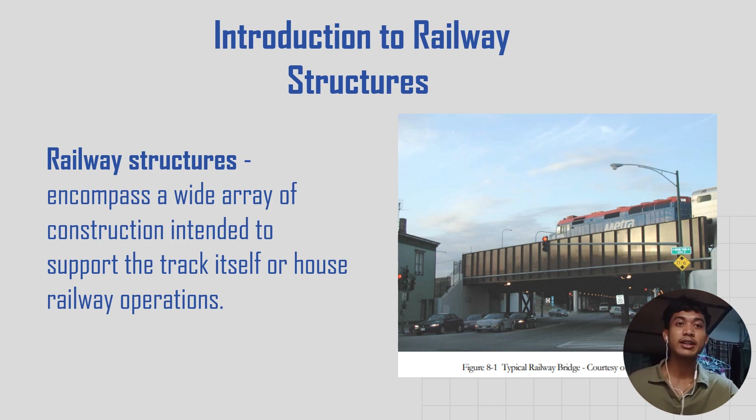So, what is a bridge deck? A bridge deck is a portion of a railway bridge that supplies a means of carrying the track rails. So when we say a bridge deck in a railway track, it is like the train's pathway when it goes over a bridge. It's like the surface that supports the train tracks, allowing trains to safely cross things like rivers or gaps in the land.

Imagine a train traveling on a strong structure over a river. The part where the tracks sit is the bridge deck. The deck needs to be really sturdy to handle the weight of the train and the forces it creates. Depending on the bridge, the deck can be made of materials like concrete or steel. So, when a train is going over a bridge, it's moving on a bridge deck.

As you can see here in this visual representation, we have an example of a ballast track. A ballast track contains a ballast section on the railway. So this is the rail. This is the sleeper. This is the ballast section, where rocks are located. We'll be talking about this later, but first let's focus on what is a bridge deck. So this is a bridge deck, the one that carries the weight of this railway.

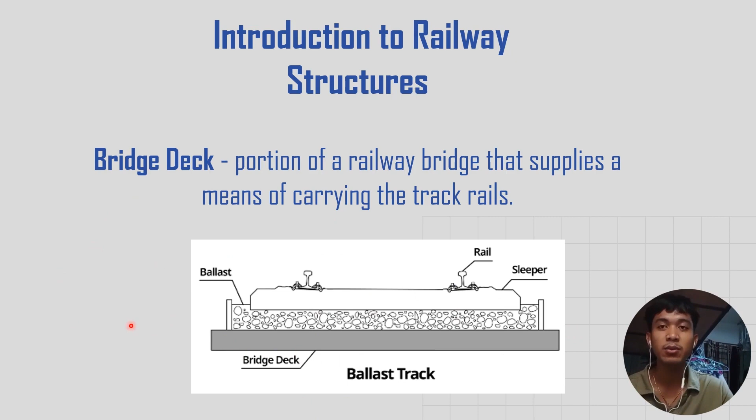So basically, there are two general types of bridge deck. The first one is the open bridge deck. The rails are anchored directly to timber bridge ties supported directly on the floor system of the superstructure. The second one is the ballasted bridge. The rails are anchored directly to timber track ties supported on the ballast section. So let's explain them one by one.

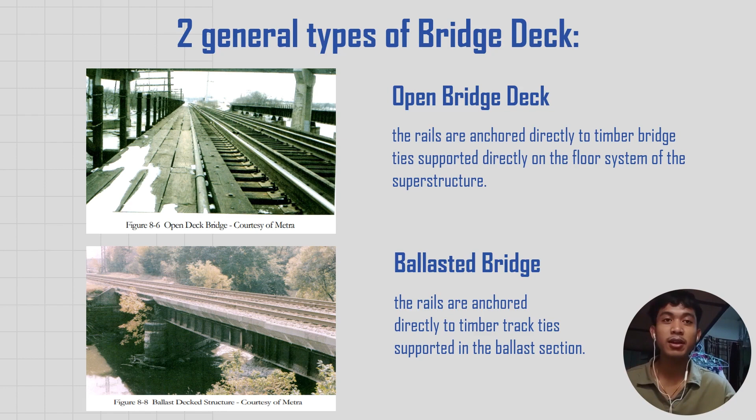So let's first talk about open bridge deck. An open bridge deck is like a big, strong platform held by supports, and it's used to help things like roads or trains cross over something like a river, valley, or other road. The word open means that it doesn't have a roof or walls. It's more like a wide and sturdy floor that lets you see through.

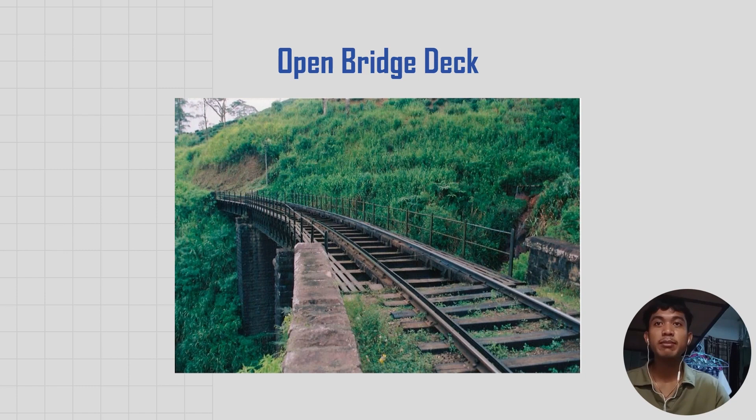So the openness of the bridge means it doesn't have roof or walls, as you can see in this illustration, making it lighter and allowing wind to pass through. This design helps keep the bridge steady and safe. In simple terms, an open bridge is like a strong and elevated road or track that helps people and vehicles go from one side to the other without any trouble. The openings in the deck also allow for better ventilation, which can be important for certain types of bridges or for managing heat generated by trains.

The second type of bridge deck is the ballasted deck. The timber track ties, also known as sleepers or cross ties, are horizontal supports that hold the rails in place. These ties are placed on a layer of ballast, which is a material like crushed stone or gravel. A ballasted bridge is like a strong and stable pathway that goes over something like a river or a road. It's made with a special kind of rocks or stones called ballast, placed on a bridge to provide support and stability.

So unlike the open bridge deck, the ballasted deck is supported by ballast. With the help of these rocks, the bridge is stable and sturdy.

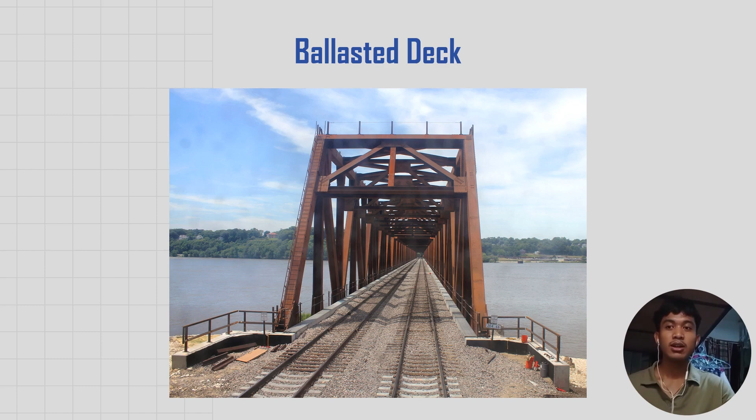So, the purpose of ballast in a railway track is to provide stability, as what I've said earlier. Also, it helps to drain water and support for the tracks. Ballast is a layer of coarse, angular stones or gravel that is placed on the roadbed. So, what's the purpose of ballast?

So, natay four diri akong gibutang, four. So, first is stability. Why? Ballast helps distribute the load of the train and its cargo evenly across the underlying soil. This distribution of weight prevents the tracks from sinking into the ground and provides stability to the railway track. So, it helps distribute the load of the train evenly sa katong railway across the underlying soil. The second one is drainage.

So ballast allows for proper drainage of water away from the tracks. The open spaces between the stones permit water to flow through, preventing the accumulation of water that could otherwise weaken the track structure and cause erosion.

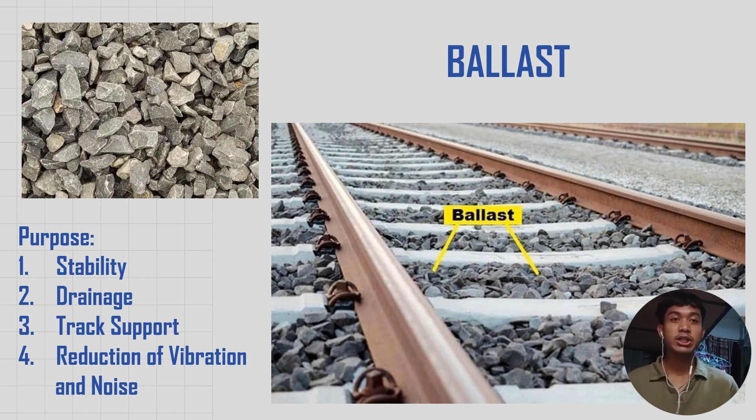So after the four purposes of ballast, napod ay four ka reasons. The first one is angular shape. Ballast stones are typically angular rather than rounded. As you can see here, wala kayo makita nga rounded ballast, puro angular shape. This angular shape helps the stones interlock with each other, creating a stable and compact layer that resists movement. This is crucial for maintaining the alignment and stability of the tracks.

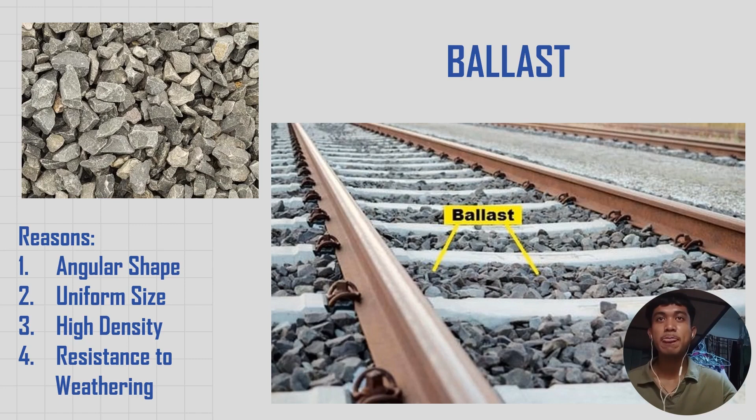Now let's proceed to structural design. So what is structural design? It is the methodical investigation of the stability, strength, and rigidity of structures. The basic objective in structural analysis and design is to produce a structure capable of resisting all applied loads without failure during its intended life.

So structural design is the thoughtful and meticulous process of developing plans for buildings and other constructions, ensuring they are not just aesthetically pleasing, but more importantly, stable siya and secure siya. It begins with a thorough understanding of unsay purpose aning na structure. Pang residential ba ni siya, pang bridge ba ni siya, or skyscraper.

So engineers carefully select materials like concrete, steel, or wood based on their properties and suitability for the project. The design process involves calculating and distributing loads, considering factors such as the weight of the structure, environmental conditions, and potential stresses. Safety factors are incorporated to provide a margin of safety, guarding against unforeseen circumstances.

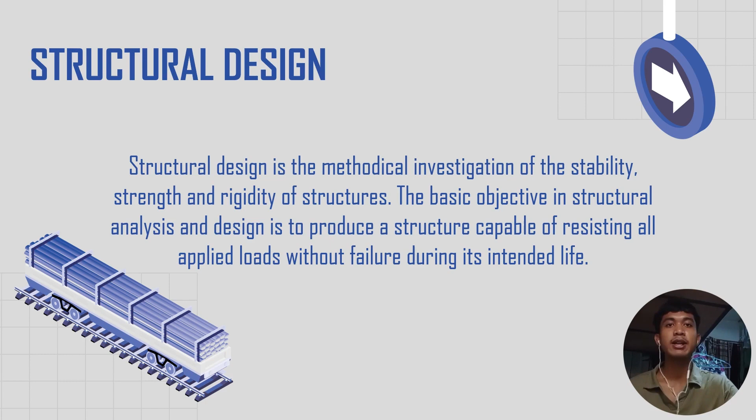So the result is a comprehensive set of plans and specifications that guide builders in constructing a structure that is not only functional and efficient but also capable po siya to withstand the various forces nga ma-encounter throughout its lifespan. So there are three phases that structural design contains: first is planning, the second one is design, and the third one is construction.

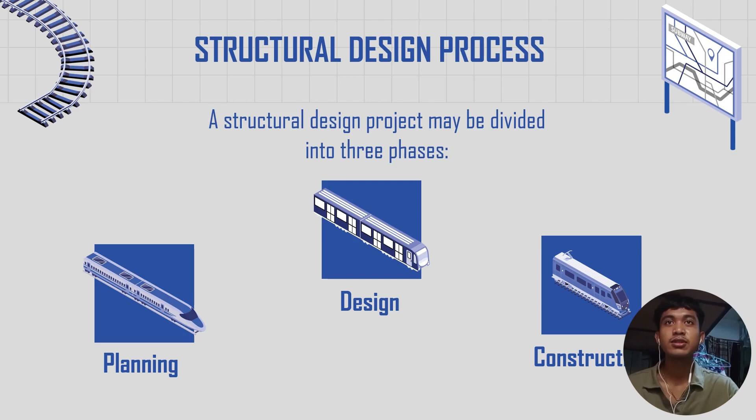So in the planning phase, this phase involves consideration of the various requirements and factors affecting the general layout and dimensions of the structure and results in the choice of one or perhaps several alternative types of structure which offer the best general solution. During this phase, engineers and architects carefully consider various requirements and factors that can influence the overall layout and dimension of the structure. These factors may include the intended use of the structure, the site conditions, budget, constraints, and aesthetic consideration.

So basically, the planning phase in the structural design process is like the brainstorming stage where engineers and architects figure out what the building or structure needs to do and unsay dapat itsura niya. It's a bit like deciding the blueprint before building something.

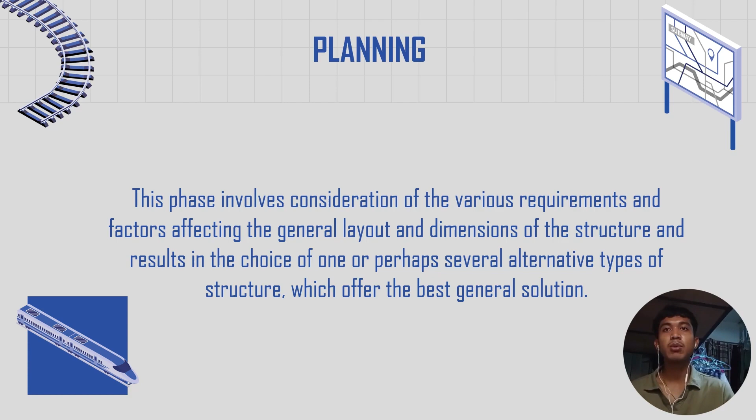So the goal of the planning phase is to explore different alternatives and ultimately choose one or possibly a few types of structures that offer the best general solution to meet the project's objectives. This phase is like the initial brainstorming and decision making stage where the team outlines the broad concepts and possibilities before moving on to the more detailed design and construction phases.

The second phase is the design phase. This phase involves a detailed consideration of the alternative solutions defined in the planning phase and results in the determination of the most suitable proportions, dimensions, and details of the structural elements and connections for constructing each alternative structural arrangement being considered.

So in this phase, our engineers and architects carefully think about the sizes, shapes, and specific details of every part of the structure, like beams, columns, and connections between them. It's a bit like deciding the exact pieces and measurements needed to build something strong and safe.

So the design phase in structural design is like drawing the detailed plans for building a structure such as a house or a bridge. So imagine you're designing a puzzle. You need to figure out how all the pieces fit together to make a strong and stable picture.

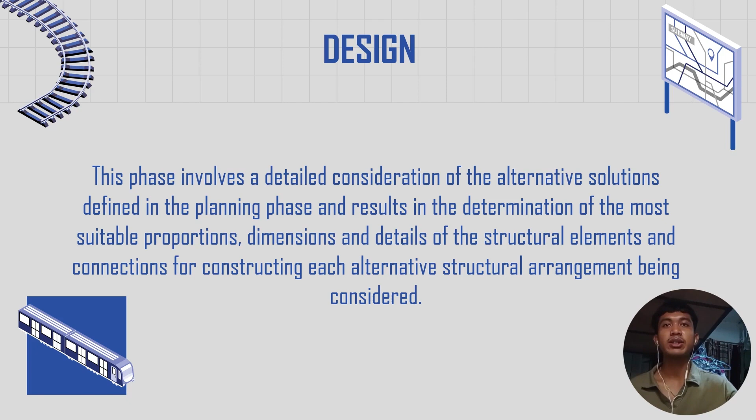So in the design phase, engineers and architects use math and science to decide unsang materials o shapes para aning nga structure. I-calculate nila how much weight it needs to hold, like people, furniture, or vehicles, cars, and think about saan nila pag stand sa mga weather, environmental loads like wind or earthquakes.

So the last phase for this structural design is the construction. This phase involves mobilization of personnel, procurement of materials and equipment, including their transportation to the site, and actual on-site erection. So the construction phase indeed involves the mobilization of personnel, like the workers involved in construction, of course. So the procurement of materials and equipment, including their transportation to the construction site, and the actual on-site erection or assembly of the structure.

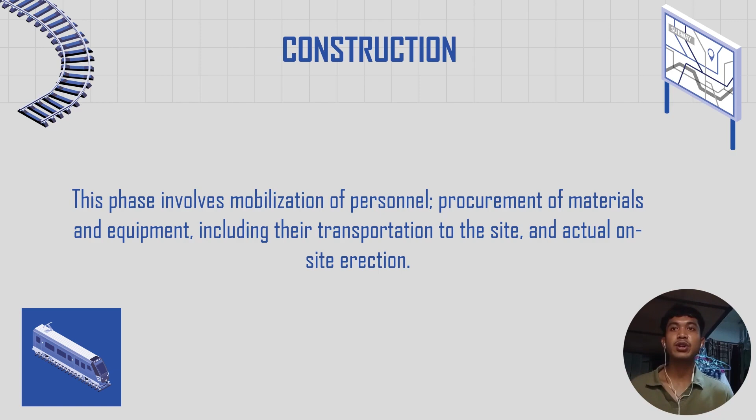So this phase is where the plans developed during the design phase come to life. And the construction team works to build a structure according to the specified guidelines and detailed plans. So builders follow the detailed plans and instructions created during the design phase, using materials like concrete, steel, or wood to put everything together. So it's like turning the design on paper into a physical, real-life structure. So during construction, of course, workers make sure everything is put in the right place and follows the plan to make the structure strong, safe, and ready to be used.

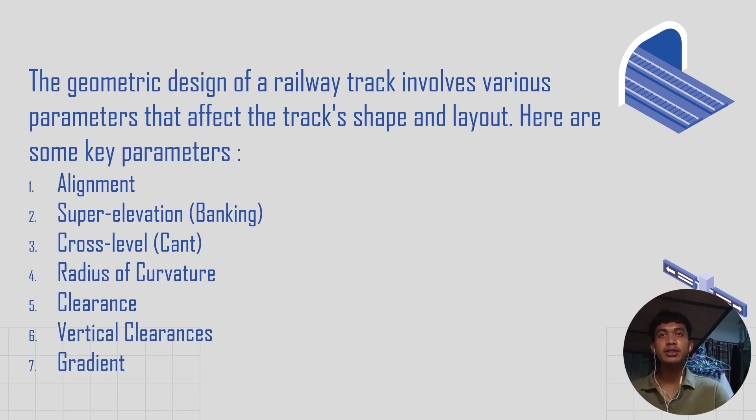Sa railway structure, napunay siya yung mga parameters. So the geometric design of a railway track involves various parameters that affect the track's shape and layout. So, unsa din ang parameters di ay? In simple terms, a parameter is like a special detail or condition that you consider when dealing with something. It's a factor or characteristic that helps define or understand the situation. So, for example, if you're baking a cake or cookies, the amount of sugar you use is a parameter because it affects how sweet the cookies will be. In more technical contexts, like in science or engineering, parameters are specific values or considerations that can influence how things work or behave. They are like the important pieces of information you need to know about something. So, mo to siya ang parameter.

So, here are some key parameters in a railway track. First is alignment. Second is super elevation or banking. Cross level or cant. Radius of curvature, clearance, vertical clearances, and gradient. So, ito na siyang isa-isahon o discuss para mas masabtan. Ito siya.

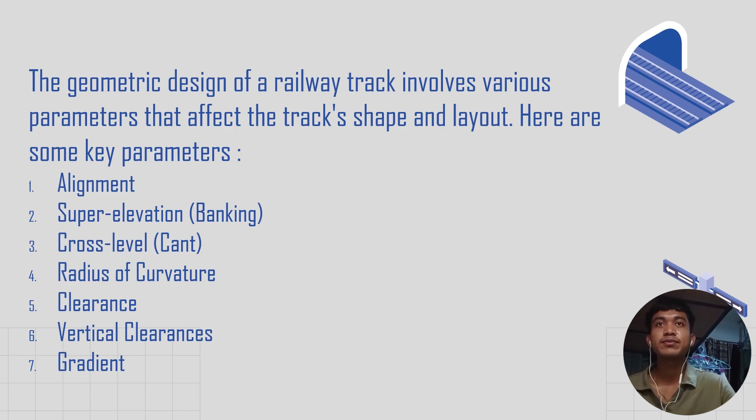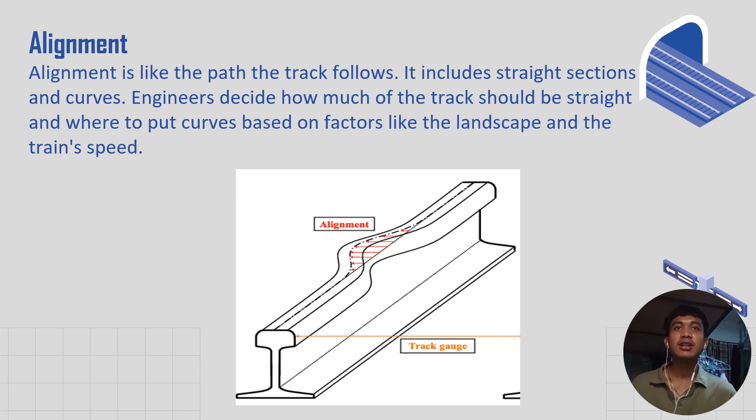So, alignment. Alignment is like the path that the track follows. It includes straight sections and curves. Engineers decide how much of the track should be straight and where to put curves based on factors like the landscape and the train speed. So, of course, sa alignment, dili na ka magpataka-taka og butang og curve dira, no? Kay pataka mo og curve dira, of course, ang dagan sa train is madaot, and that will cause a major accident. So good alignment ensures that the track follows a smooth and safe path, avoiding sudden turns or twists. Bad alignment could make the ride uncomfortable for passengers, cause wear on the tracks, and affect the train's stability.

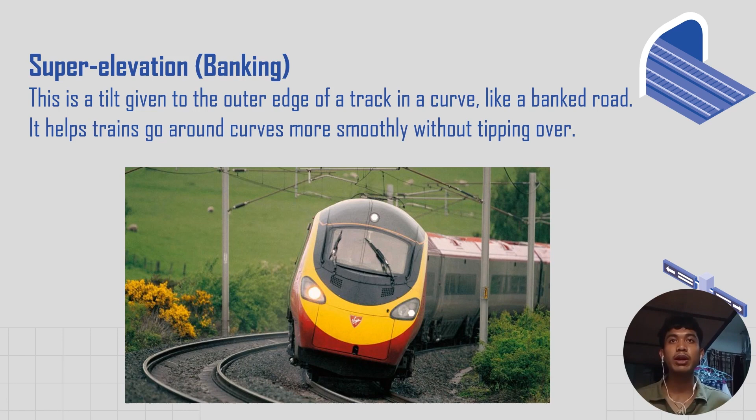So super elevation or banking. This is a tilt given to the outer edge of a track in a curve, like a banked road, so it helps trains go around curves more smoothly without tipping over. So banking helps trains smoothly navigate curves. Without the super elevation or the banking, trains might experience more friction on curves, leading to wear on wheels and tracks, and potential safety issues.

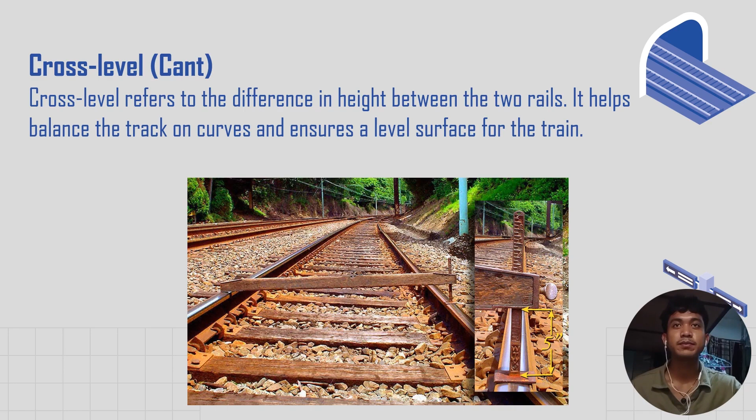The next is the radius of curvature. This is about how tight or gradual a curve is. Larger radii are more gradual curves, while smaller radii are tighter curves. So larger radii create smoother, more comfortable curves. Tight curves could cause discomfort for passengers and increase wear on wheels and tracks. So if atong imaginon nga mas gamay, mas tight ang curve, di ba mas lisod, mas hadlok siya nga mukalit ra ka og liko, no? And that will cause wear sa wheels.

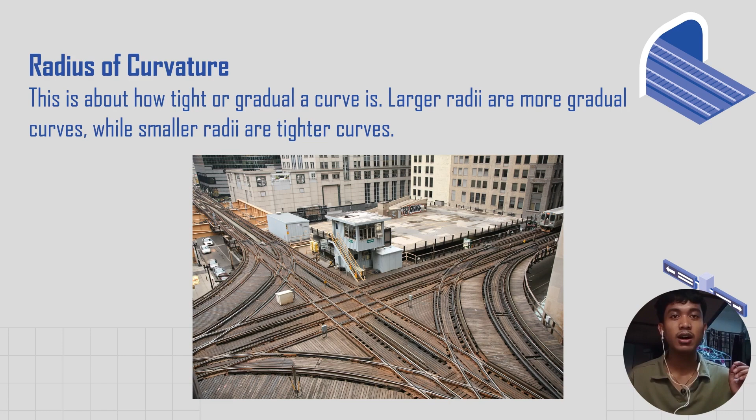And then the larger the radii, the larger the curve, the smoother it is, the safer that path is, compared to tight curves.

Next is the clearance. Clearance is the space around the tracks. It ensures there's enough room for trains to pass each other safely and for other structures like bridges or platforms. Of course, the path our trains take should not be cramped, there should be safe space so that if trains ever meet, they don't collide with each other or with other structures like bridges or platforms. So there should be proper space. That's clearance. Proper clearance ensures there's enough space around the tracks for trains to pass each other safely. Insufficient clearance could result in collision or disruptions.

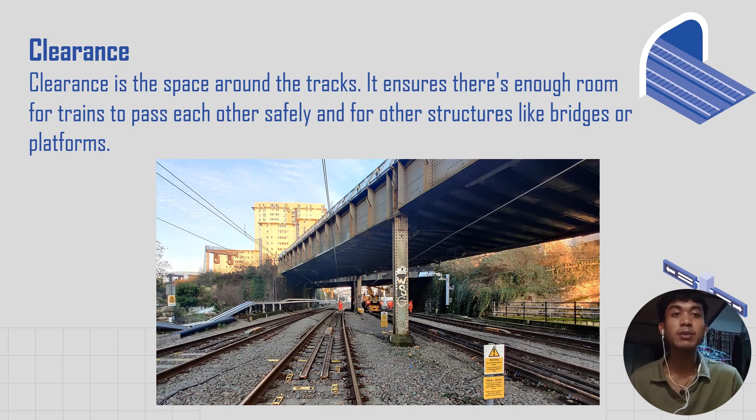So earlier we just said clearance, now we specify vertical clearance. This involves ensuring there's enough space above and below the track for things like tunnels and overhead structures. What we discussed earlier was more like horizontal clearance, while this one is vertical clearance.

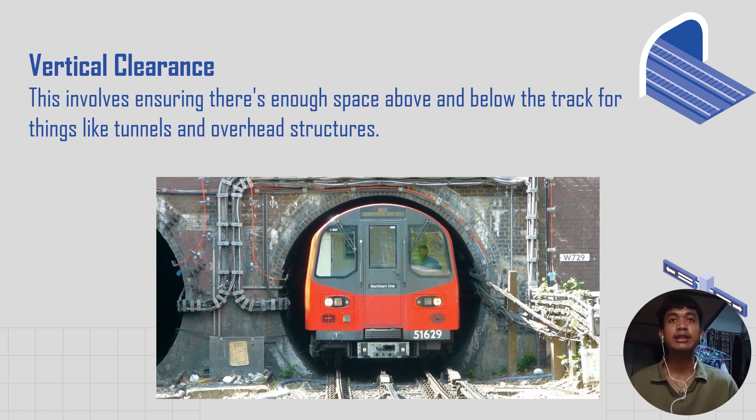As you can see in the figure below, like a tunnel, there should be enough space for trains to pass safely. Ensuring enough space above and below the tracks prevents collision with structures like tunnels and bridges.

Insufficient vertical clearance could damage trains and structures. The last one is the gradient. A gradient is the slope of the track. If you've ever walked up or down a hill, you know what a slope is. Similarly, tracks can go uphill, called an ascending gradient, downhill, a descending gradient, or stay level.

In a railway track, a gradient refers to the slope or incline of the track, determining whether it goes uphill, also called rising gradient, or downhill, also called falling gradient. Gradients are crucial for the efficiency, safety, and cost effectiveness of train travel, ensuring that energy demands are balanced and that trains can navigate changes in elevation in a controlled manner.

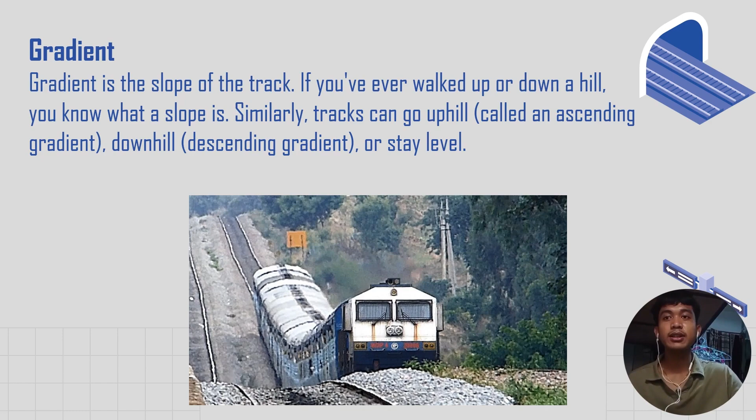A rising gradient is one in which the track rises in the direction of the movement of traffic, and a falling gradient is one in which the track loses elevation in the direction of movement of traffic. A rising gradient on a railway means the tracks are going uphill, like when you're walking or driving up a hill, going against the force of gravity.

For example, if a train is moving from a lower point to a higher point on the tracks, it's going up a rising gradient. A falling gradient, on the other hand, means the tracks are going downhill, the opposite of rising. In this case, the tracks slope downward, helping the train move with the force of gravity.

If a train is moving from a higher point to a lower point, it's going down a falling gradient. A gradient is normally represented by the distance traveled for a rise or fall of one unit. Sometimes the gradient is indicated as percent rise or fall. For example, if there is a rise of 1 meter in 400, the gradient is 0.25%.

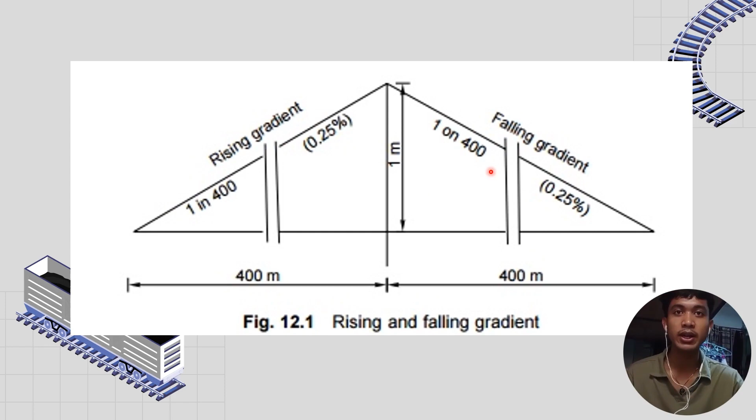So why are gradients important? Gradients are provided to meet several objectives: to reach various stations at different elevations, to follow the natural contours of the ground to the extent possible, and to reduce the cost of earthwork.

The purpose of these gradients is to facilitate the movement of trains over varying elevations. When the tracks ascend or have a rising gradient, trains face an uphill climb and require additional power to reach higher points. Conversely, when the tracks descend or have a falling gradient, trains can coast downhill with the assistance of gravity, requiring less energy.

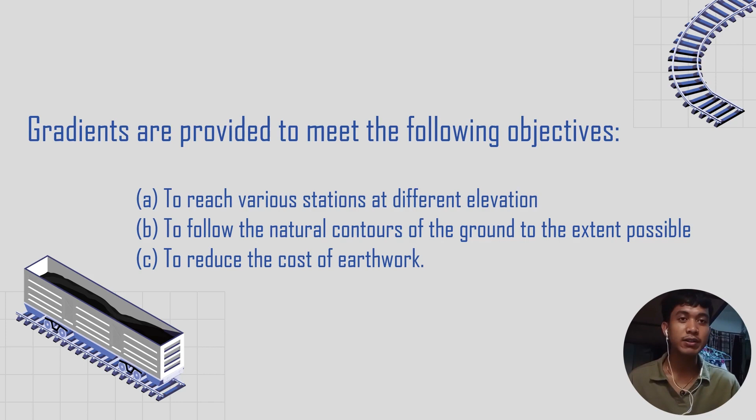In summary, rising gradients go up like a hill and falling gradients go down. These gradients are important for train operations as they affect how much effort and energy the train needs to move and control its speed. Engineers carefully plan and design gradients to optimize train performance and efficiency on different sections of the railway.

Good day, everyone. Today I will continue to report about structural design of railways and pavements. Since many have already reported on railway design, my report is about pavement design.

So what is pavement design? Pavement design is a highway pavement structure consisting of superimposed layers of processed materials above the natural subsoil or subgrade, whose primary function is to distribute the applied vehicle loads to the subgrade.

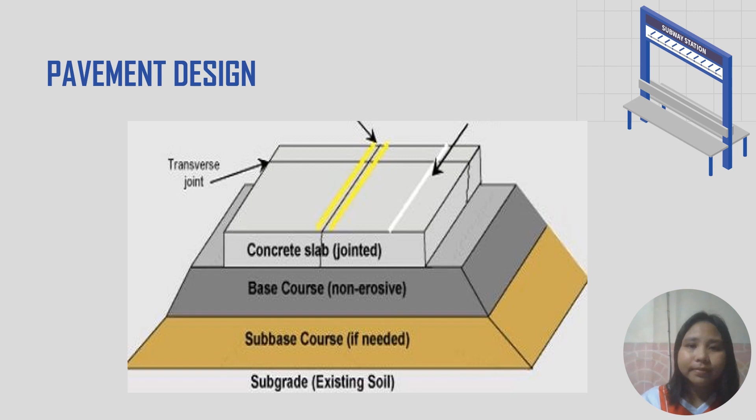So, requirements of a pavement.

Requirements of a pavement: sufficient thickness to distribute the wheel load stresses to a safe value on the subgrade soil, structurally strong to withstand all types of stresses imposed on it, and adequate coefficient of friction to prevent skidding of vehicles.

A smooth surface to provide comfort to road users even at high speed, producing the least noise from moving vehicles, and a dust-proof surface so that traffic safety is not impaired by reducing visibility.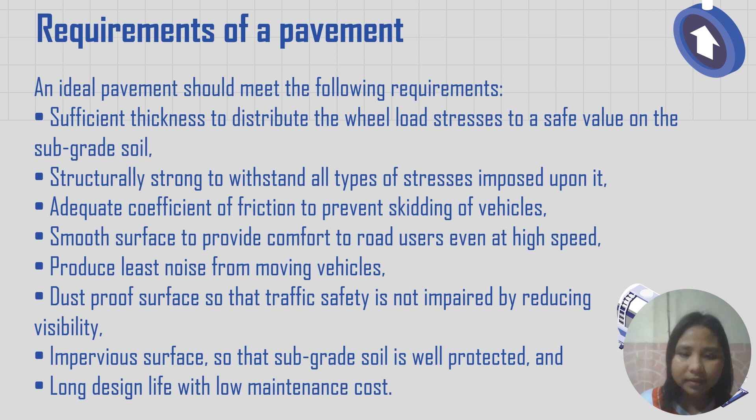So, soil engineering for highway design. The basic characteristics of a soil may be described in terms of its origin, formation, grain size, and shape.

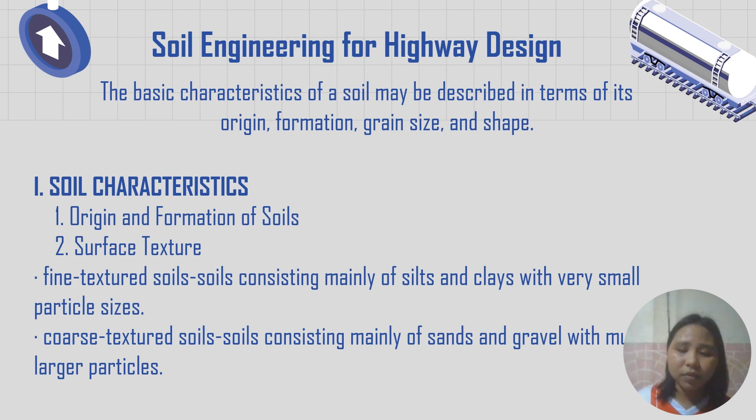And next is the surface texture. It should be either fine-textured soils, which are soils consisting mainly of silts and clays with very small particle sizes, or coarse-textured soils, soils consisting mainly of sand and gravel with larger particles.

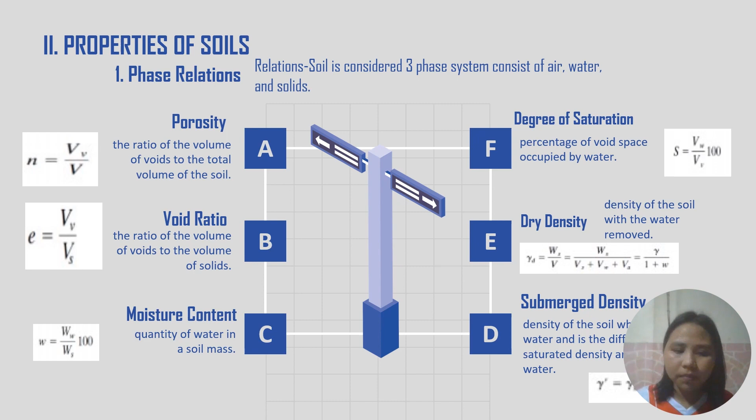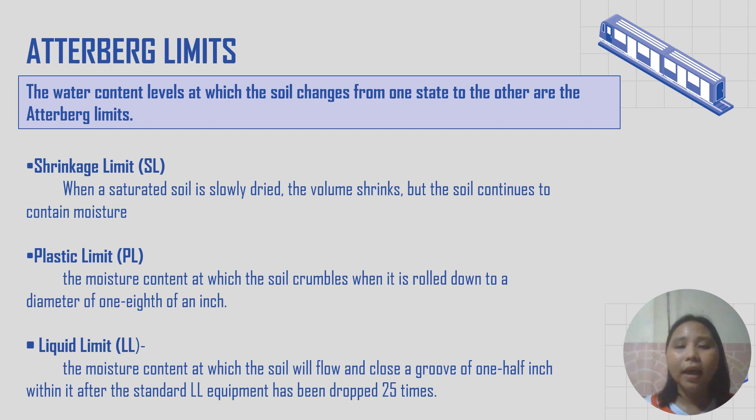Soil surveys play an important role in highway construction as they involve the investigation of soil characteristics along the proposed highway routes. These surveys are essential for identifying suitable soils that can be utilized as sub-base and fill materials in the construction process.

The careful selection of appropriate soils ensures structural integrity, stability of the infrastructure, and longevity of the highways. The aim of this is to provide significance to soil surveys for highway construction, highlighting a better understanding of soil properties and their implications on the overall project.

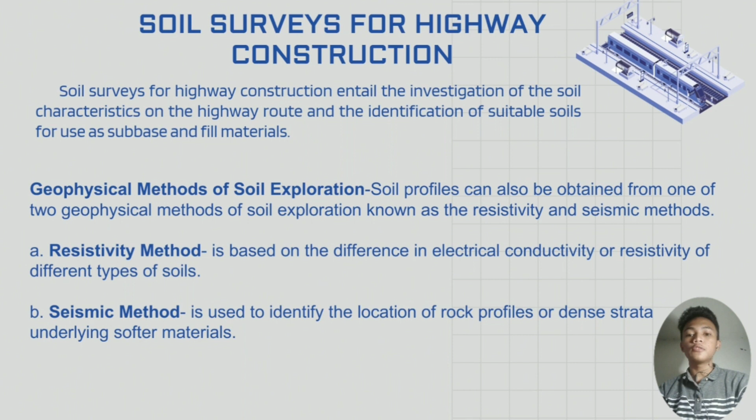O naghatag og fundamental roles in supporting crucial decision making and processes related to the resource extractions and infrastructure development and disaster risk assessment. So next is the soil compaction.

It also ensures the stability and durability of the road, as well as the prevention of settlement or deformation over time. Ang importance ani para ma-achieve ang high density compaction cannot be overstated, as inadequate compaction can lead to various issues, including settlement, rutting, cracking, and eventually pavement failure.

Compacted soil provides solid foundations for the road, extending its lifespan, minimizing maintenance cost, and also it ensures a safe and smooth driving experience for our motorists. Through proper compaction techniques, so ang proper nga techniques sa soil compaction kay nag-provide og improving the load bearing capacity and also the stability. By implementing these effective compaction practices, highways can be constructed with a durable and long-lasting foundation. It also ensures optimal performance and safety for our motorists and users.

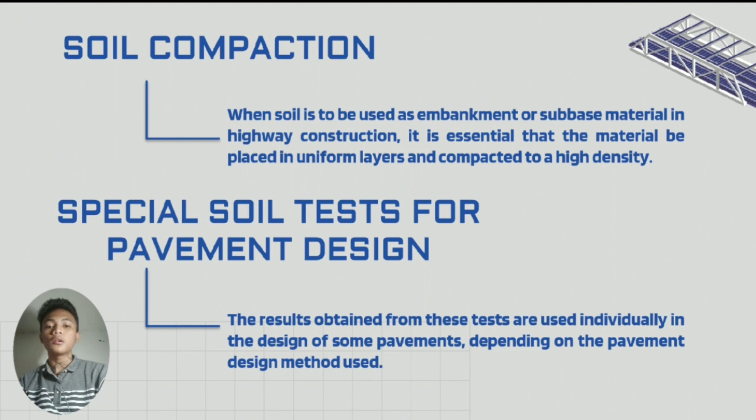So ito nga granular structure nag-enable sa pavement to flex and adapt to changes in temperature and traffic conditions, ensuring better durability and longevity. So for better understanding sa flexible pavement, naa tay different types of flexible pavements. First is the conventional layered flexible pavement. It is a layered system where high quality expensive materials are placed on top where stresses are high and low quality cheap materials are placed in lower layers.

In road construction, conventional layered flexible pavements have long been the go-to approach. These pavements are designed as layered systems with primary objectives of optimizing performance and durability. The concept behind these pavements involves strategically placing high-quality, expensive materials on the top layer where the stresses are highest, while using low-quality and inexpensive materials for lower layers. This design strategy aims to strike a balance between cost effectiveness and structural integrity.

So next type of pavement is full-depth asphalt pavement, constructed by placing bituminous layers directly on the soil subgrade. This is more suitable when there is high traffic and local materials are not available. Asphalt pavement is a commonly used material for constructing roads. It also offers high durability, flexibility, and cost effectiveness. In certain scenarios where high traffic volumes are expected and local construction materials are scarce, an alternative method called full-depth asphalt pavement can be employed.

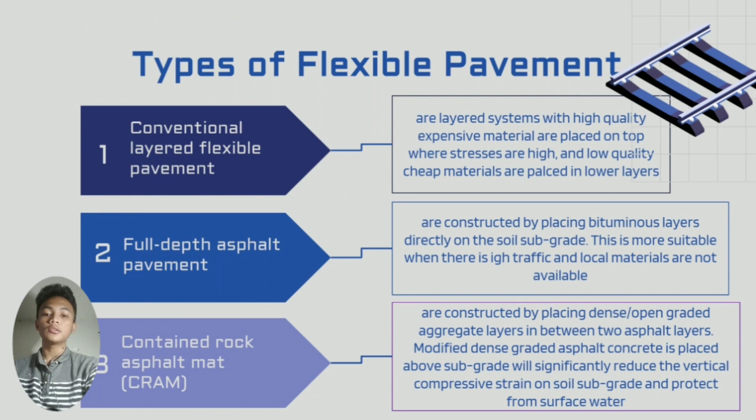It also has advantages in reducing soil strain, improving drainage, and enhancing overall pavement durability. So in this process, we will address the construction process, the material properties, and the best practices associated with utilizing it for infrastructure development. So we also have typical layers of flexible pavement. The first layer is called seal coat. It is a thin surface treatment used to waterproof the surface and to provide skid resistance.

So seal coat is commonly used in thin surface treatment. It serves the dual purpose of waterproofing the underlying surface and also enhancing skid resistance. This protective layer is applied to various surfaces including roads, driveways, parking lots, and pathways.

So next we have the layer called tack coat. It is a very light application of asphalt, usually asphalt emulsion diluted with water. It provides proper bonding between two layers of binder course and must be thin, uniformly cover the entire surface and set very fast.

So, the role of tack coat is to ensure the structural integrity of roads and pavements. It serves as a thin layer of asphalt, typically consisting of asphalt emulsion diluted with water, that is applied between two layers of binder course.

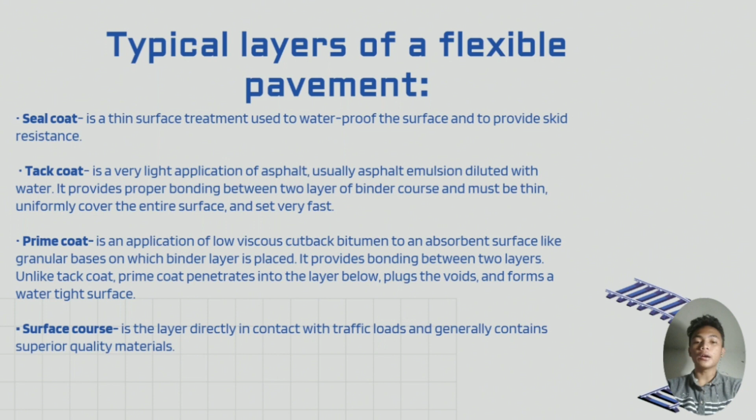Typically, concrete is the preferred material for this layer due to its exceptional strength and durability. This choice enables the surface course to effectively bear and distribute the excessive loads generated by repetitive traffic movements.

The next layer is called base course. It is the layer of material immediately beneath the surface or binder course, and it provides additional load distribution and contributes to the subsurface drainage. So, the base course is a crucial component of road construction. It serves as the layer of materials located directly below the surface of the binder course.

Next we have the layer called sub-base course. It is the layer of material beneath the base course, and its primary functions are to provide structural support, improve drainage, and reduce the intrusion of fines from the subgrade in pavement structures. This layer focuses on the topic of sub-base course.

So, it is an essential element in the construction of road and pavement structures. The sub-base course located beneath the base course plays a crucial role in providing structural support, facilitating drainage, and preventing the intrusion of fines from the subgrade. By examining the functions and significance of the sub-base course, we can gain a deeper understanding of its importance in ensuring the durability and longevity of transportation infrastructures.

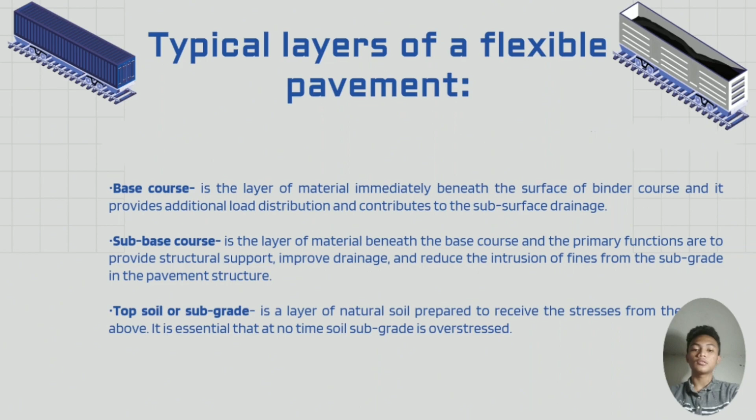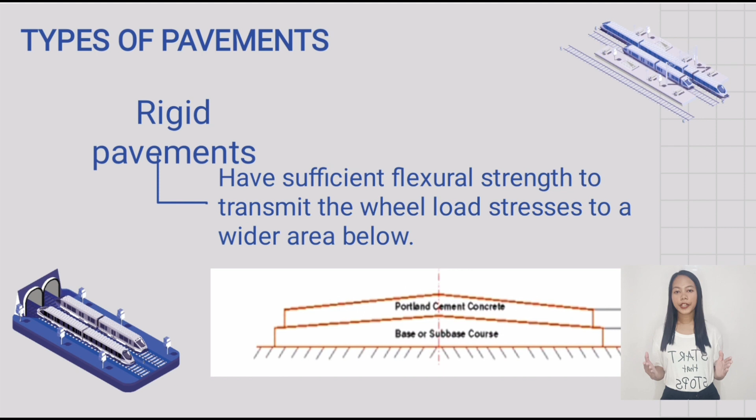Today, I'm going to continue the discussion about the types of rigid pavements. Rigid pavements are a type of pavement that is constructed using concrete slabs. They are designed to be very stiff and strong, and they are able to withstand heavy loads. Rigid pavements are typically used for applications where durability and long life are important, such as highways, airports, and industrial facilities.

Components of rigid pavements. Rigid pavements are typically composed of the following layers: the subgrade, the natural soil that the pavement is built on. Second is the subbase, a layer of crushed stone or gravel that is placed over the subgrade to provide a stable foundation for the pavement slabs. Third is the pavement slabs, the concrete slabs that make up the surface of the pavement.

Fourth is the joints, the space between the pavement slabs that allow for movement due to temperature changes. Next is the seals, materials that are placed in the joints to prevent water from entering the pavement structure.

So, rigid pavements have advantages. Rigid pavements have several advantages over flexible pavements, including durability. Rigid pavements are very durable and can withstand heavy loads. Next is long life. Rigid pavements have a long lifespan of 20 to 30 years or more. Low maintenance. Rigid pavements require very little maintenance. Next is the smooth ride. Rigid pavements provide a smooth ride.

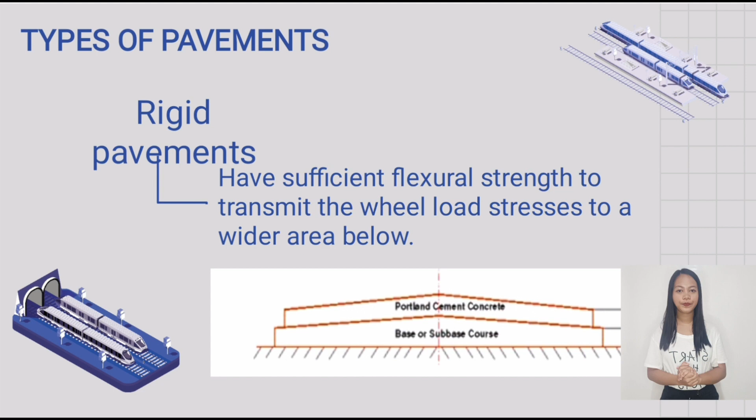So overall, rigid pavements are a valuable asset for infrastructure development. They provide a durable and long-lasting surface that can withstand heavy loads. Rigid pavements are also relatively low maintenance, making them a cost-effective choice for many applications. The examples of rigid pavement tests are the California bearing ratio test and the Hveem stabilometer test.

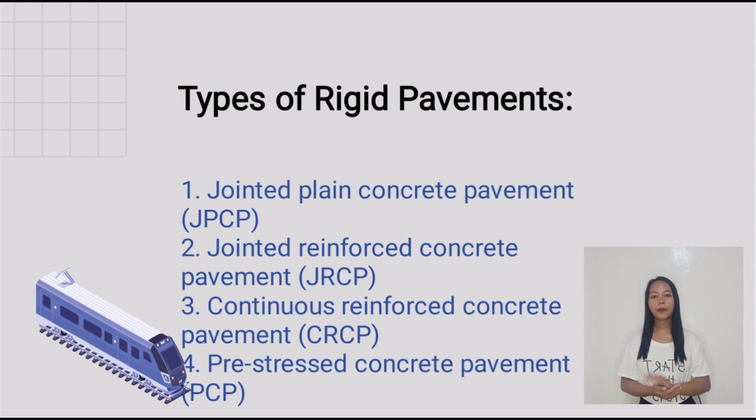So, let's proceed to the four types of rigid pavements: first is jointed plain concrete pavements, second is jointed reinforced concrete pavements, third is continuous reinforced concrete pavements, and fourth is pre-stressed concrete pavements.

So, jointed plain concrete pavements, JPCP, contain enough joints to control the location of all expected natural cracks. All necessary cracking occurs at joints and not elsewhere in the slabs. JPCP do not contain any steel reinforcement. However, there may be load transfer devices, which are dowel bars, at transverse joints and deformed steel bars, tie bars, at longitudinal joints. The spacing between transverse joints is typically about 15 feet for slabs 7 to 12 inches thick.

Jointed concrete pavement refers to a type of pavement made up of individual slabs or panels of concrete that are separated by joints. These joints allow for controlled cracking and movement, accommodating temperature changes and preventing uncontrolled cracking. The design and construction of these joints help distribute the stresses and strains induced by traffic loads and environmental factors, contributing to the durability and performance of the concrete pavement.

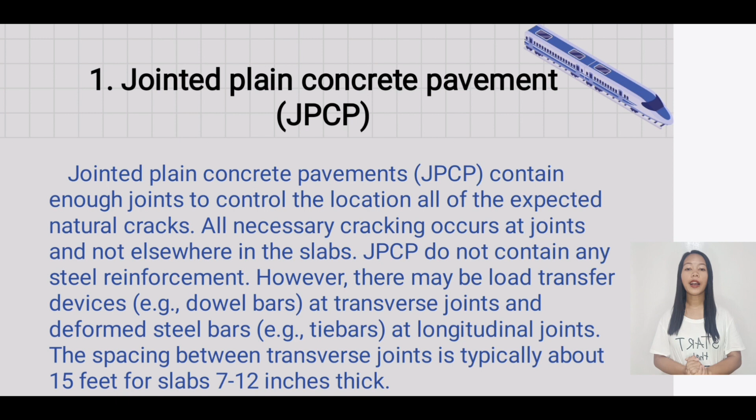Jointed reinforced concrete pavement, JRCP, is a type of rigid pavement that combines the principles of jointed concrete pavement with the added strength and durability provided by reinforcement. It involves the use of steel reinforcement, such as rebar or welded wire mesh, in the concrete to enhance its structural capacity. The joints in JRCP serve multiple purposes, including accommodating the natural expansion and contraction of the concrete due to temperature changes and preventing uncontrolled cracking.

The inclusion of reinforcement helps mitigate the effects of tensile stresses and provides added support to the concrete, reducing the likelihood of cracks and increasing the overall longevity of the pavement.

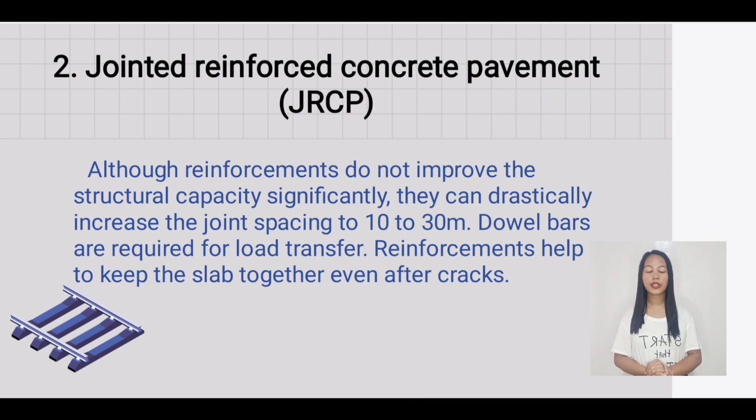Next is the continuous reinforced concrete pavement. Complete elimination of joints is achieved by reinforcement. Continuous reinforced concrete pavement (CRCP) is a type of rigid pavement that differs from jointed pavements in that it lacks transverse joints. Instead of having regularly spaced joints to control cracking, CRCP relies on the continuous reinforcement throughout the entire length of the pavement. This reinforcement, typically in the form of steel bars, helps distribute the stresses and control cracking without the need for transverse joints.

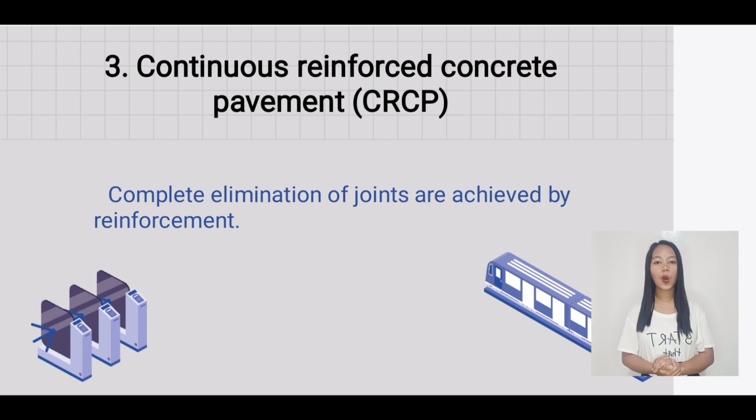CRCP is designed to minimize the occurrence of transverse cracks and is known for its long-term durability and reduced maintenance needs. The continuous reinforcement provides structural support, allowing the pavement to better withstand the effects of temperature changes and traffic loads. CRCP is often used in highways and other high traffic areas where the goal is to achieve a smooth and durable pavement surface.

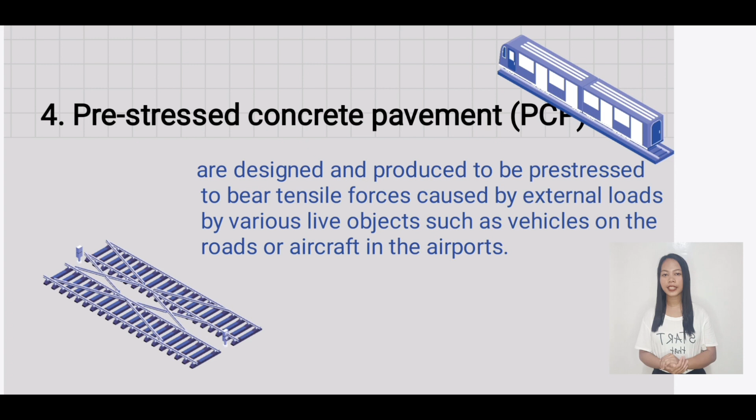The next slide is all about pre-stressed concrete pavements, which are designed and produced to be pre-stressed to bear tensile forces caused by external loads by various live objects such as vehicles on the roads or aircraft in the airports. Pre-stressed concrete pavement involves the use of pre-stressing techniques to enhance the performance and durability of concrete pavement. In this method, high-strength steel tendons or cables are placed in the concrete before it is cast. These tendons are then tensioned to apply compressive forces to the concrete before it experiences external loads.

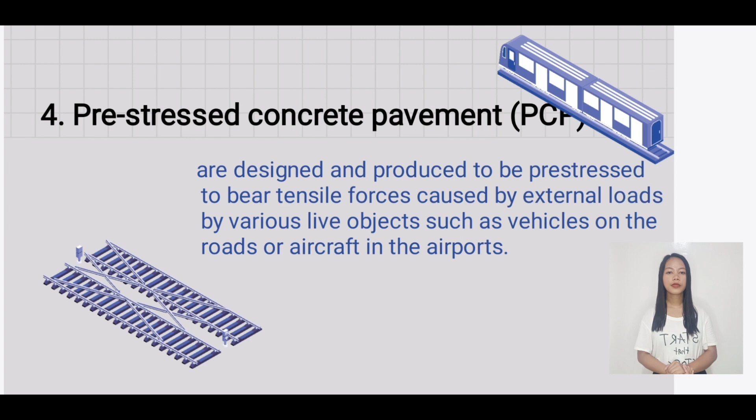The idea of this is to create a state of compression in the concrete which counteracts the tensile stresses that occur when the pavement is subjected to loads. The pre-stressing process helps to control cracking, improve load carrying capacity, and enhance the overall performance of the pavement. Pre-stressed concrete pavement is often used in situations where a high level of structural strength and durability is required, such as bridge decks, parking structures, and other heavy-duty applications. This method can result in...

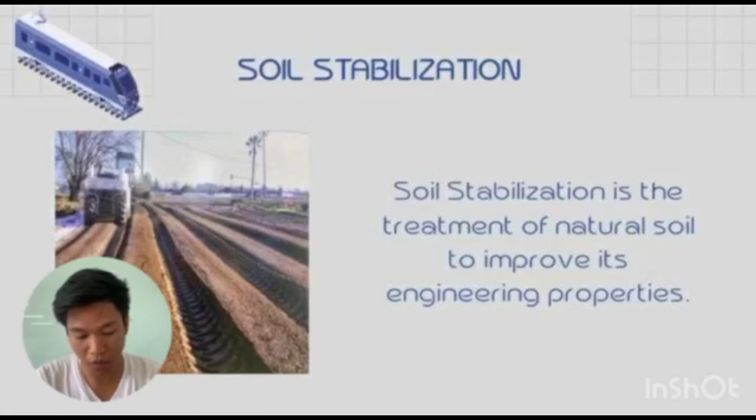Soil stabilization is a fundamental process in civil engineering aimed at improving the mechanical and chemical properties of soil to enhance its load-bearing capacity and overall stability. Various techniques are employed to achieve this goal. Mechanical stabilization involves compaction or blending with additives like lime or cement, altering the soil's physical characteristics. Soil stabilization is essential for construction projects, ensuring the longevity and performance of structures by mitigating issues related to weak or problematic soils. The choice of stabilization method depends on factors like soil type, project requirements, and environmental conditions.

Next is chemical stabilization. It is a pivotal technique in civil engineering that involves the introduction of chemical additives to alter the properties of soil and enhance its engineering characteristics. Common chemical stabilizers include lime, cement, and fly ash. When mixed with the soil, these additives initiate chemical reactions that lead to improvements in strength, durability, and compressibility. Lime reacts with the soil to create a pozzolanic reaction, forming stable compounds that increase the soil's bearing capacity and reduce its susceptibility to swelling or shrinking.

Cement stabilization involves the hydration of cement particles, resulting in a matrix that binds soil particles and enhances overall cohesion. Next is fly ash, a byproduct of coal combustion, which can chemically react with soil components to improve both its strength and long-term stability. Chemical stabilization is particularly effective in treating expansive or clayey soils, transforming them into more stable and reliable construction materials. This technique plays a crucial role in creating a solid foundation for infrastructure projects, ensuring the longevity and performance of structures built on chemically stabilized soils.

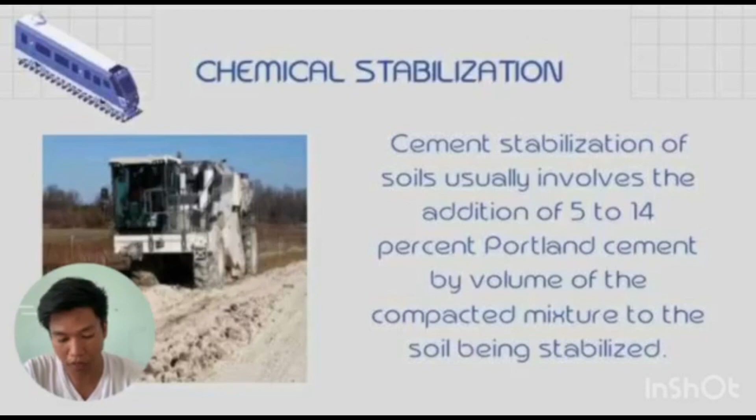The third criterion is lime stabilization. It is a prominent method in geotechnical engineering used to enhance the engineering properties of soil. This process involves the addition of lime, typically in the form of quicklime, also known as calcium oxide, and hydrated lime, which is calcium hydroxide, to the soil. Upon mixing, a chemical reaction known as the pozzolanic reaction occurs between lime and the siliceous or aluminosilicate particles in the soil. This reaction results in the formation of stable compounds such as calcium silicate hydrates, which significantly improve the soil's strength, reduce plasticity, and enhance its load-bearing capacity.

The benefits of lime stabilization include increased durability and reduced compressibility, making the treated soil more suitable for construction projects. This method is widely employed in road construction, foundation stabilization, and other infrastructure projects to create a stable and robust subgrade and ensure the long-term performance of structures.

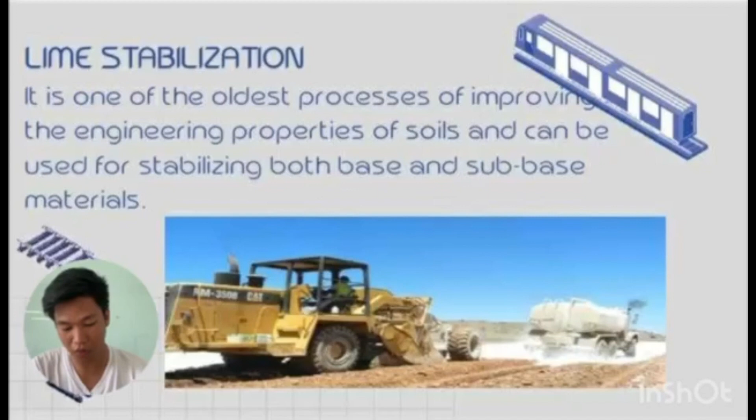The last criteria is the AASHTO method. AASHTO means American Association of State Highway and Transportation Officials. This is a widely used approach in the United States for designing flexible pavement structures such as asphalt pavements to ensure their structural integrity under varying traffic loads and environmental conditions.

This design method considers the structural response of the pavement through the use of the AASHTO design equations. Key factors in the AASHTO design include the traffic loadings, pavement materials, and environmental conditions. The method employs the concept of layer coefficient to characterize the structural contribution of different pavement layers, considering their stiffness and thickness. The AASHTO design method emphasizes the importance of accounting for the specific condition of the project site, including soil properties and climatic influences.

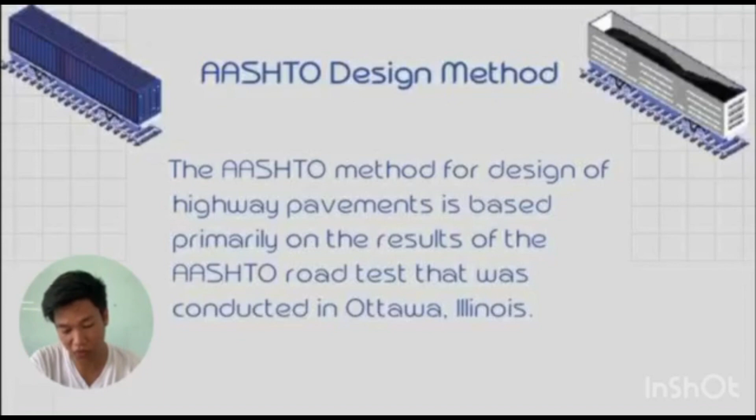By utilizing empirical relationships and performance models, the AASHTO design method aims to provide a reliable and practical framework for designing pavements that can withstand the demands of traffic and environmental factors over their design life. There are some considerations for the AASHTO design method. First is the pavement performance. Next is traffic, subgrade soil properties, materials of construction, environmental effects, drainage, and reliability.

For pavement performance, it encompasses the ability of road surfaces to endure the demand of traffic and environmental conditions while maintaining functionality and safety. It is a multidimensional concept that involves evaluating various factors such as load-bearing capacity, durability, smoothness, skid resistance, drainage efficiency, and structural integrity.

Next is the traffic. It encompasses a complex interplay of various elements including vehicle types, volumes, speeds, and patterns. The study of traffic in the context of highways is crucial for designing infrastructure that accommodates the diverse needs of road users while ensuring safety and efficiency. Factors influencing traffic include peak hours, congestion, traffic flow dynamics, and the impact of various transportation modes.